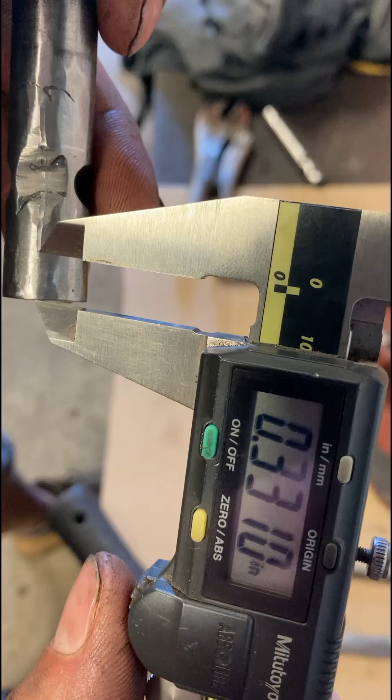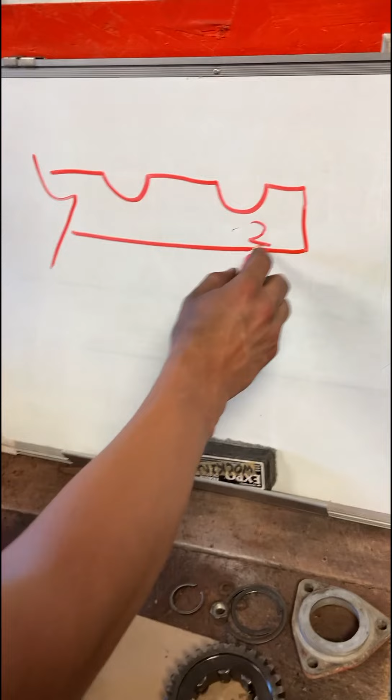To dial it in, that looks like the measurement I get. Hook it on the end and then measure to the end of the groove. It looks like 0.331. So we'll make a note for the new shift rail detent groove. This is second gear, this is third, and our measurement we got, 0.331.

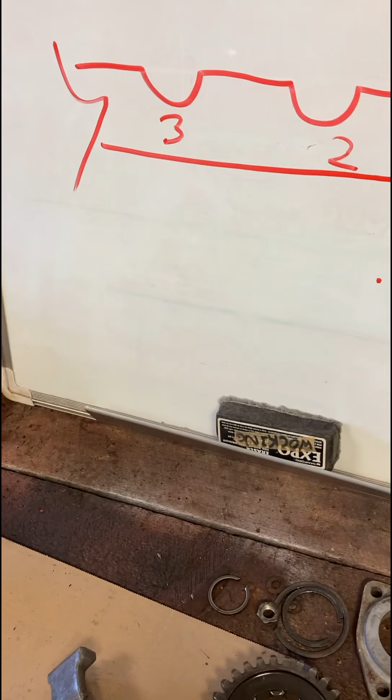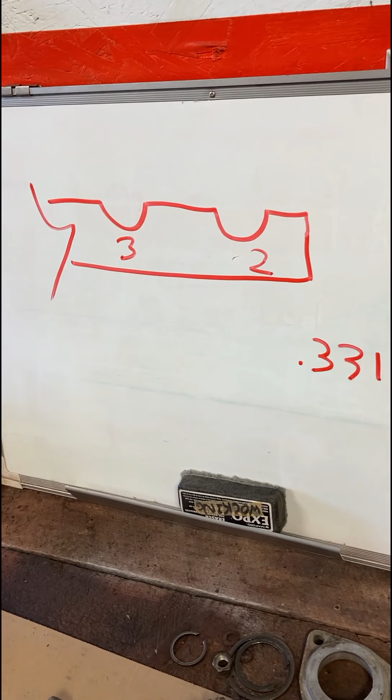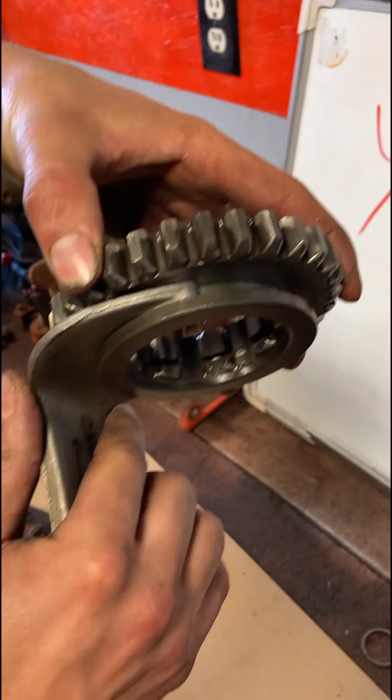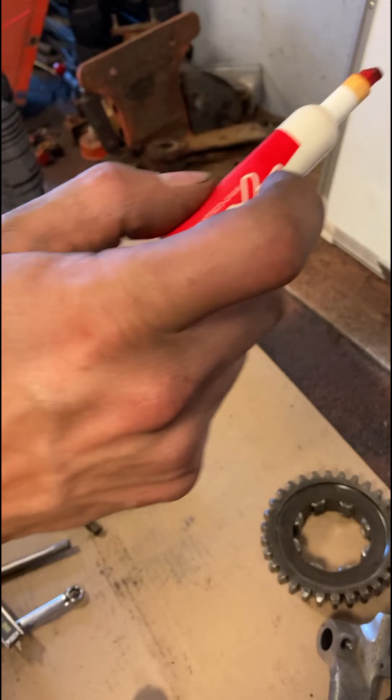Because we were forcing the shifter to make that mark of the detent ball on the welded shift rail, our measurement is not perfect. Because we had that little force on the shift fork, and because we do not want our shift fork riding with force in this groove, it's going to wear the ends out if there's some force on it. We want to back off our measurement, let's say no more than 20 thousandths.

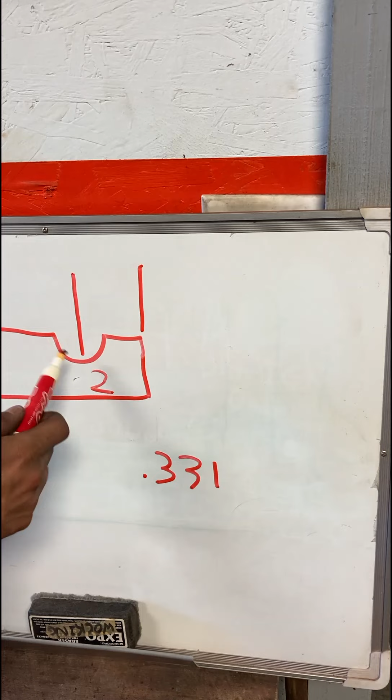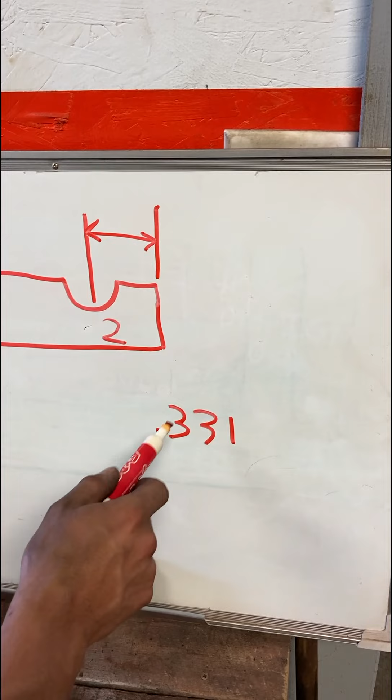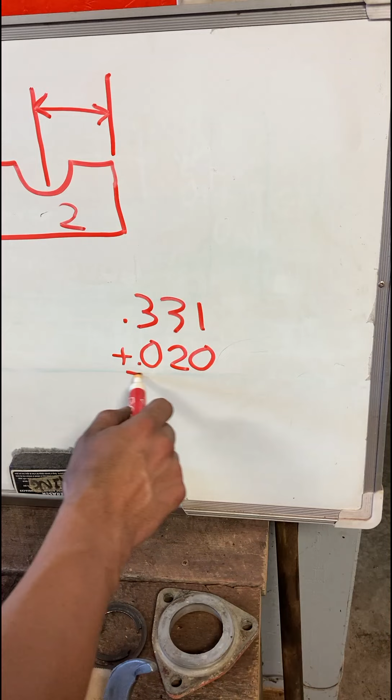So the 331 measurement, we are trying to determine the center of our new detent groove, from here to here. We will take our measurement and add, for second gear, 20 thousandths maximum. So that would be 0.351.

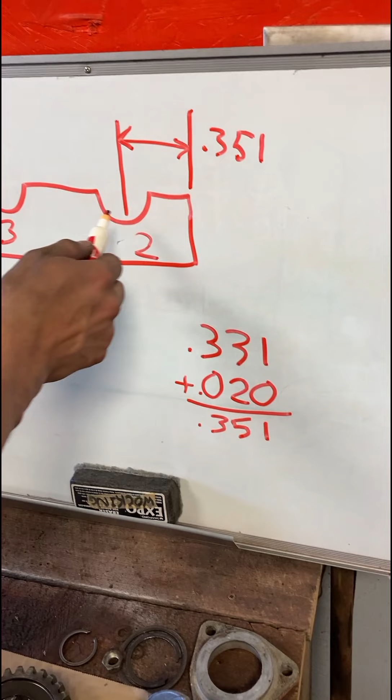So we're moving the center just back, just a hair, just to avoid constant pressure on the shift fork.

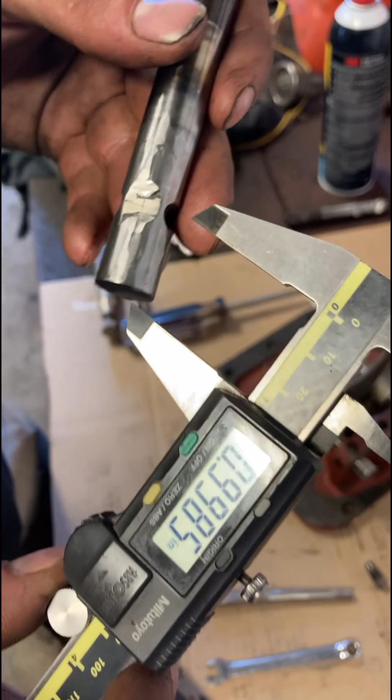Now we can try our third gear detent here and measure from the end of the shift rail to the end of the mark that we made. I think right there would be the mark. So if I can get it focused in on the camera. Yeah, right there we can see that. The caliper is right at the end of that mark from the ball.

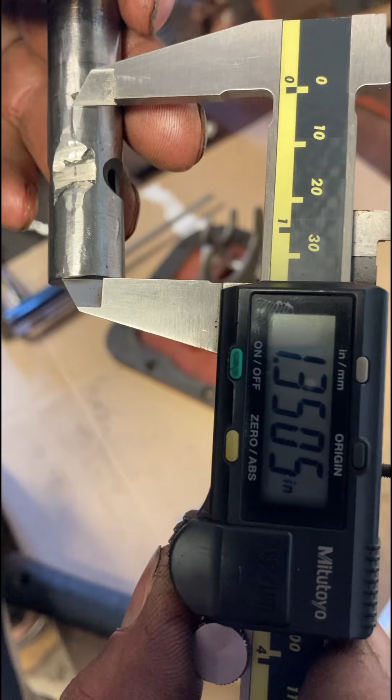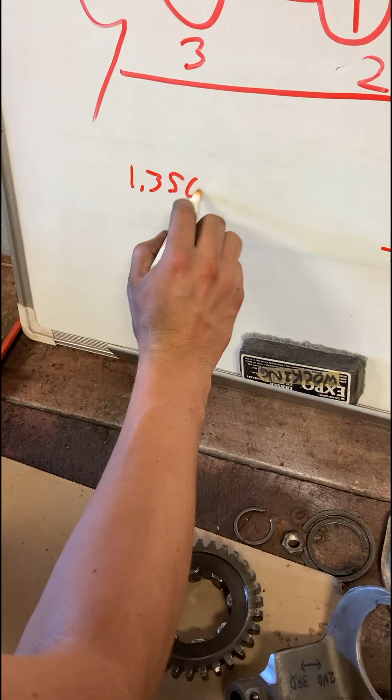And we're at 1.350. So our third, 1.350 for the center of our third gear detent.

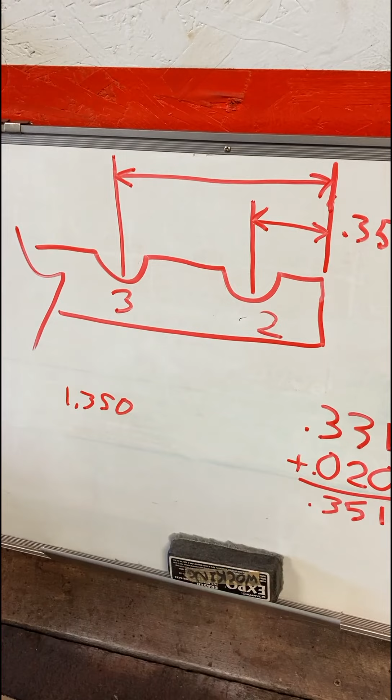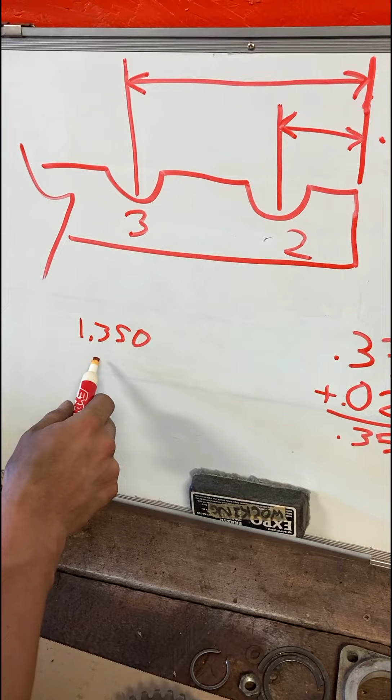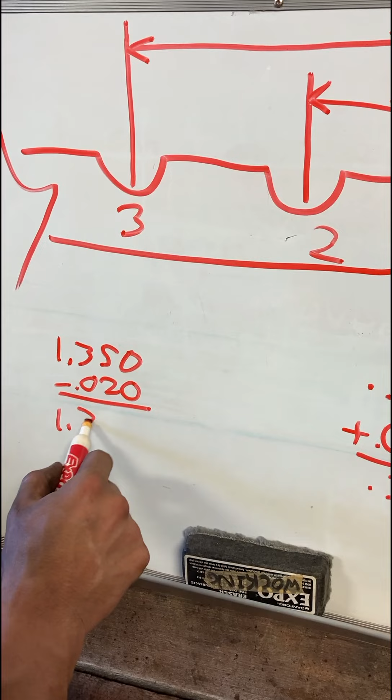Now, to give our shift fork a little break from constant pressure again, this time we are going to subtract 20 thousandths to get back towards neutral just a hair, instead of adding like we did on the second gear. So we're going to subtract 0.020, and we come up with 1.330.

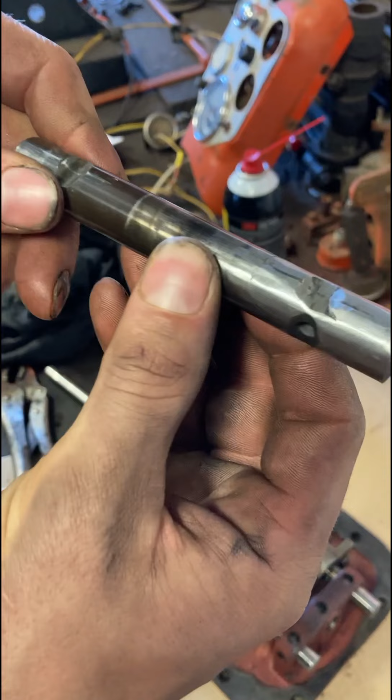So we have determined where our new detent grooves should be located. Now we can take our welded up shift rail, take it to a machine shop, or if you're good with a 4.5 inch grinder, you can start to grind the groove for the detent by hand. If you want to get it perfect, I would advise you to take it to a machine shop.

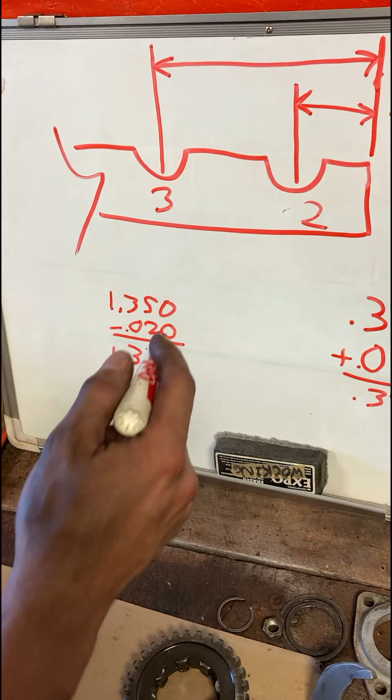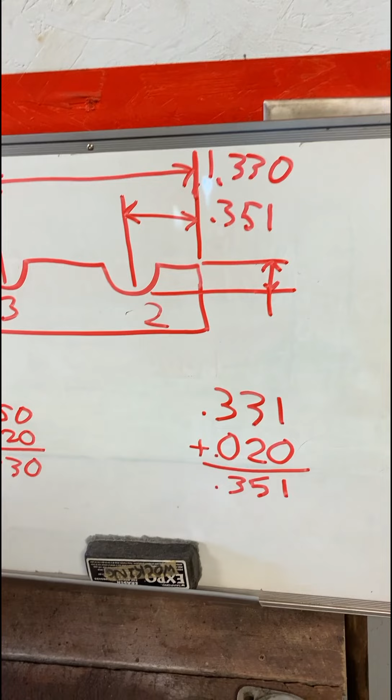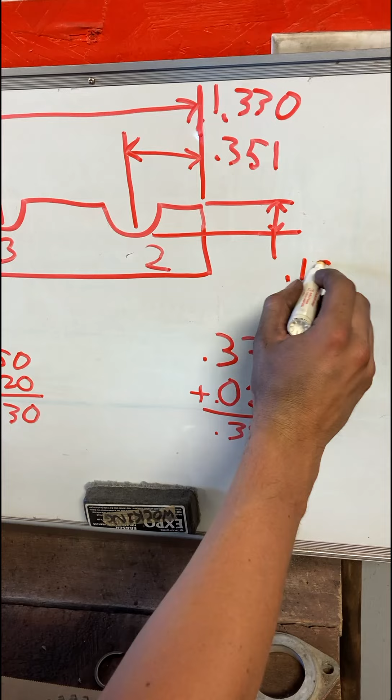This groove should be... let's see, where did I put that spec? The depth of the groove is what I'm looking for here. Yes, it should be no more than 0.155 inches deep.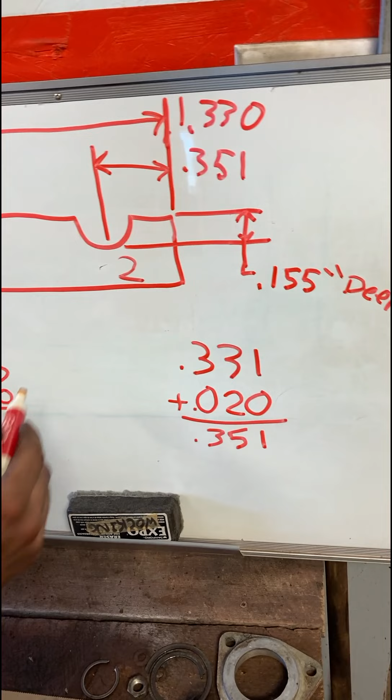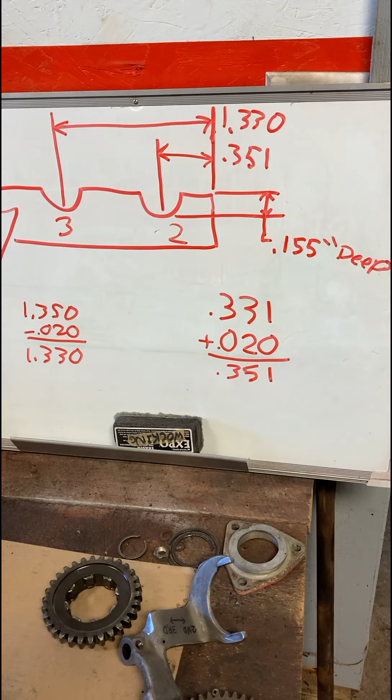That ball, the detent ball, is a 3/8 inch solid ball. You do not want the detent groove to be half of the ball deep or more than half the ball. So half of 3/8 is 0.1875... I think that's 3/16, must be.

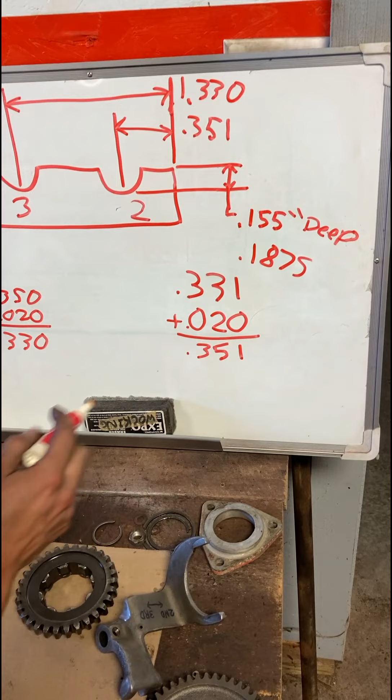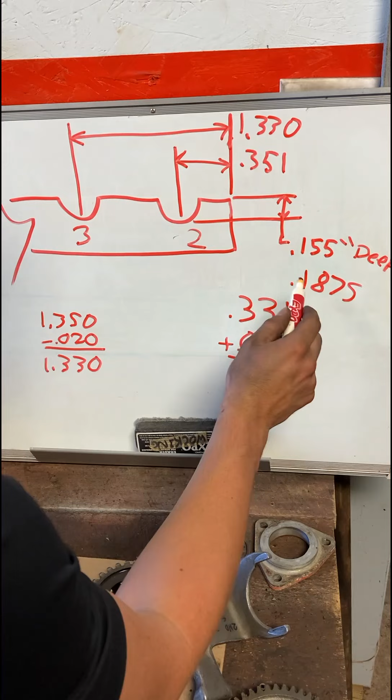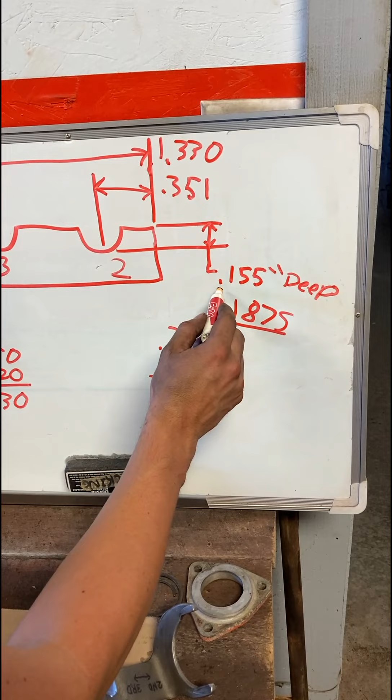You do not want the depth of that detent groove to be half of the ball, because then the ball does not want to pop out of the detent groove. Don't ask me how I know that. So 3/16 is half of 3/8, and the detent groove is not half of 3/8 deep. It should be less than half.

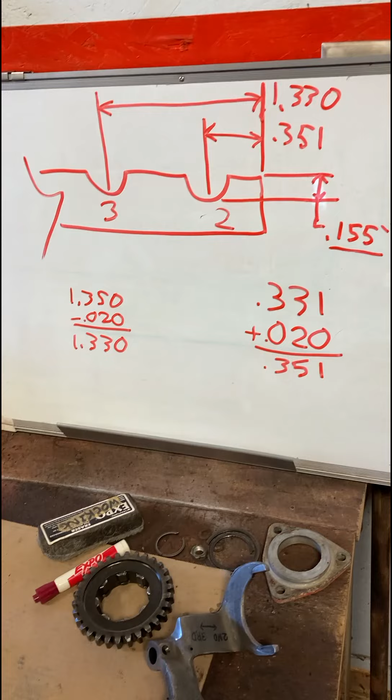So we go with maximum depth of 0.155 inches. You can give that spec to your machine shop, as well as these measurements that you've taken off of your marked welded shift rail.

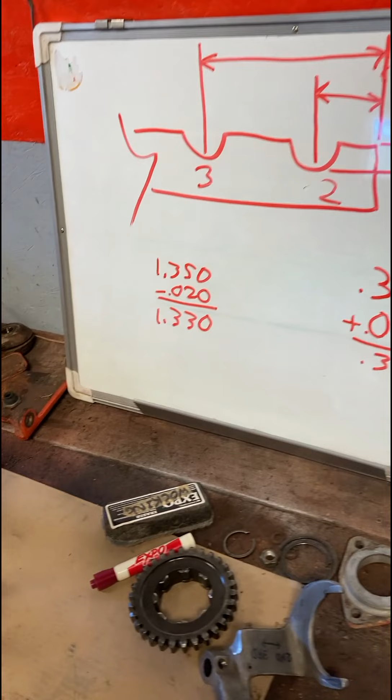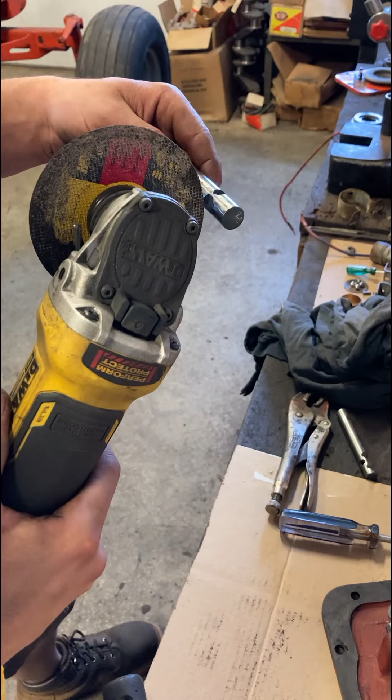I don't have a problem myself using a 4.5 inch grinder. The problem is when you use a 4.5 inch grinder and try to start cutting your grooves in the shift rail, you need to make sure that you're on track with your measurement, at least for the third gear detent groove, 1.330. So it is a very good idea to stop grinding every minute or 30 seconds and make sure the center of your groove matches that measurement we calculated.

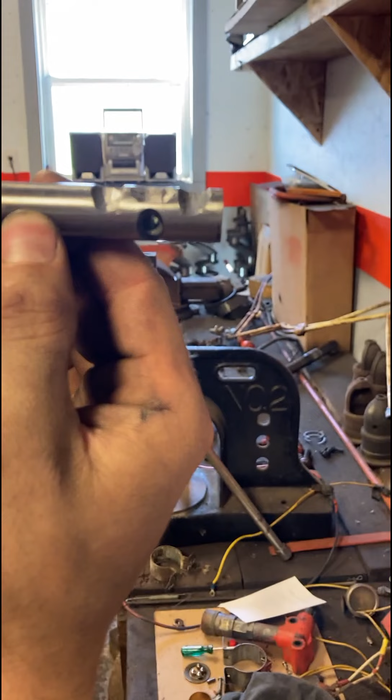Stop every minute, stop more often than that if you're worried. Eventually, with a grinder, you'll get something like this. See if I can get that, yeah, there we go. So your detent grooves will be ground in there.

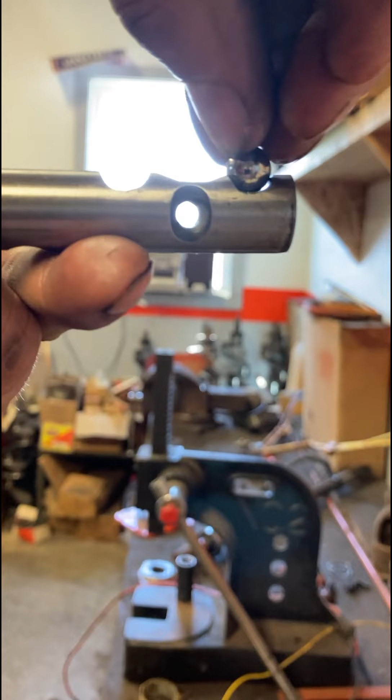This is the detent ball, and I've done this several times, so I'm quite good. You can see how that ball fits right in there. As I stated, the groove is not more than 0.155 inches deep, a little less than half of the ball, so the ball can pop out of the groove and you can shift into second, third, and other gears.

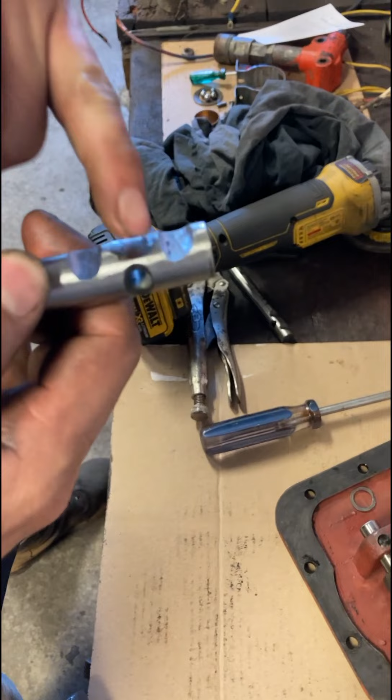This shift rail is the finished product, and like I said earlier, this flat spot in the middle is kind of irrelevant because the neutral detent is going to hold it in the middle anyway, so this could be welded up, or you could leave it flat like I did. It's not going to matter. This is the finished product.

We are going to put it in our shifter cover and just confirm that everything's on the up and up and that everything works properly.

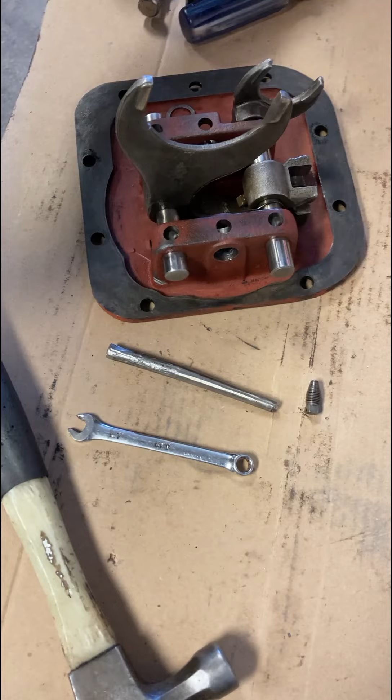Before I do that, I'm going to get the original shift rail here, and I don't know if you can see how much things were moved here, but at least 1/8 of an inch on this transmission.

I was able to move things, but sometimes it's not that much, but it's more of a preventative maintenance measure, just to make sure that you are getting full engagement on your gears, and that even if your gears do start to get a little worn, they will not pop out because you have full engagement of the gears.